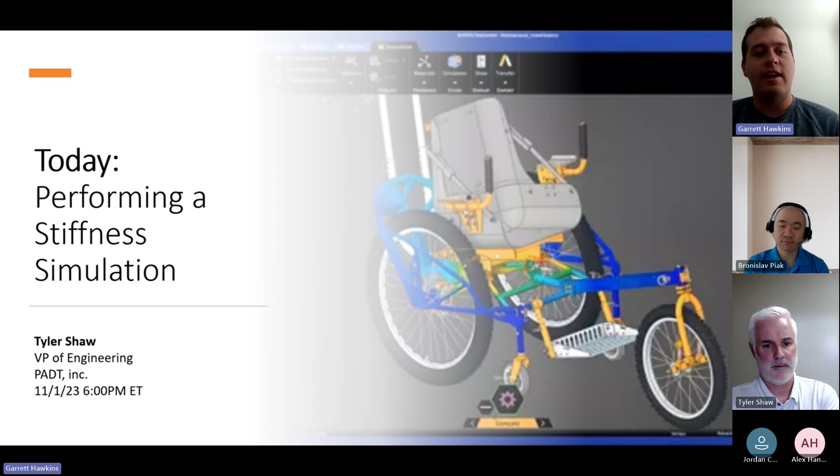Tyler, do you want to say a few words now? Yeah, so real quick, just so folks on the call understand, PADT is uniquely positioned. We do not only simulation, we also sell and operate additive manufacturing tools and capabilities. But really the benefit we bring is we get to use both of those tools to really design products. Between our team, we have about 20 or so engineers and full-time analysts doing this work. This particular talk that Bronislav has put together is really focused on how we can use simulation as part of our design and why, to give folks a little more of a concept of how to interpret these results to make more detailed design decisions.

Thanks, Bronislav. Okay, thank you. Can you all see my screen? Yep, looks great. Okay, so my name is Bronislav Piak. I'm a simulation engineer here at PADT.

Today we're going to be talking about, I know the topic was kind of performing a stiffness simulation, we kind of rebranded it a little bit. We're going to be talking about structural analysis considerations. So what are the structural analysis considerations when designing a UAV? What load cases need to be considered and why?

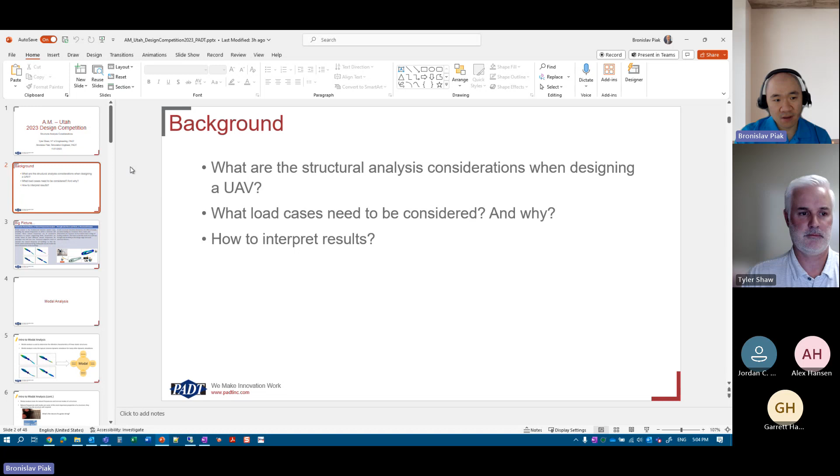How to interpret results. So there are basically two analysis types that you want to be considering when designing a UAV. One is so-called modal analysis. The second one is strength analysis, or structural analysis, sometimes called.

Modal analysis is the fundamental dynamic analysis type, providing the natural frequencies at which a structure will resonate. For instance, there's a propeller, and these are some modes, natural frequencies, mode shapes for this propeller. These natural frequencies are of paramount importance in various engineering fields.

For instance, suspensions are usually tuned so that they have different natural frequencies for passenger cars and race cars. Structural engineers need to calculate these frequencies for buildings, for instance, so that the seismic waves produced during an earthquake do not match the natural frequencies of the buildings, and they don't collapse.

The second type of analysis that is of importance when designing components and structures is structural analysis. The simplest form of it is so-called static structural analysis, and it determines the effect of steady or static loading on a structure. Outputs of this analysis are usually stress, strains, and deformations, and they can be studied under a range of loading conditions. This helps to identify weak areas with low strength and durability at the design stage and avoid expensive failures.

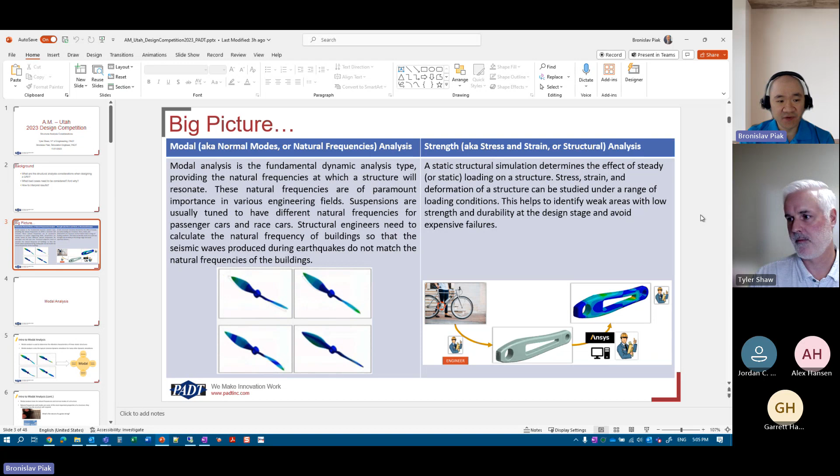So let's talk a little bit more about modal analysis first. Again, modal analysis is used to determine the vibration characteristics of linear elastic structures.

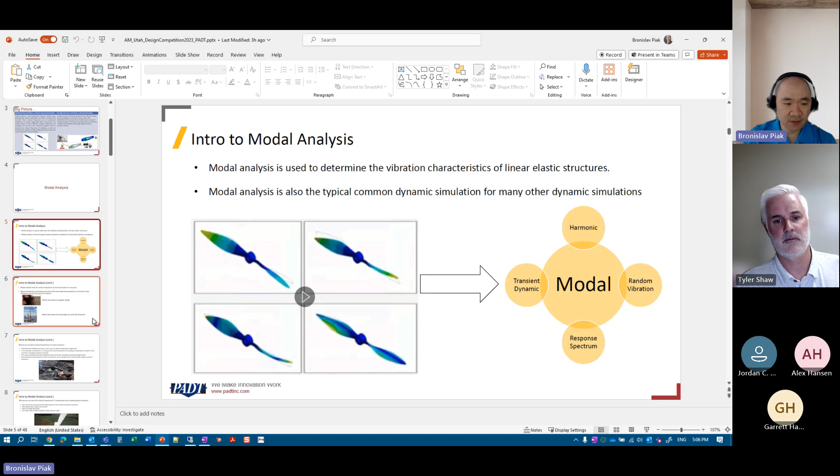Modal analysis is also the typical common dynamic simulation entry point for many other dynamic simulations. Basically, it's an entry point into more complex harmonic, random vibration, response spectrum, and transient dynamic analysis types. But still very valuable. You would always want to start with modal analysis before going deep into these more complex types of dynamic simulations.

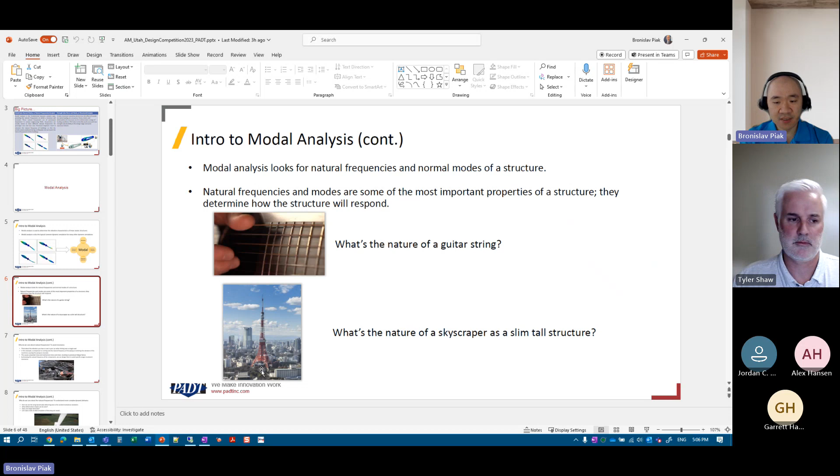Modal analysis looks for natural frequencies and normal modes of a structure. Natural frequencies and modes are some of the most important properties of a structure, and they determine how the structure will respond. For instance, think about this guitar string - what's its nature? Or a skyscraper as a slim, tall structure - what's its nature?

Why do we care about natural frequencies? The answer is to avoid resonance. Think about the vibration of a car when driving over a rough road. In this example, a compressor is running and the natural frequency of the piping matches the vibration of the machinery, causing the piping to resonate. We want to avoid this when designing, as it causes unwanted noises, mechanical stress and strain, resulting in premature fatigue failure. By knowing the natural frequency of components, we can design them to avoid specific ranges and prevent resonance.

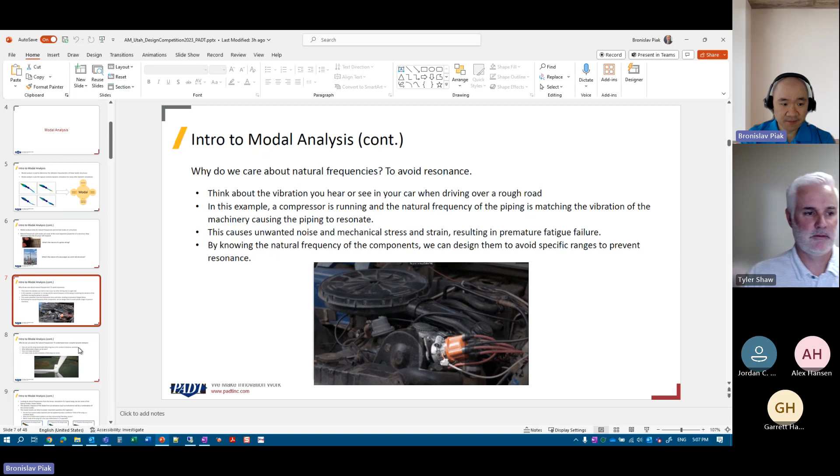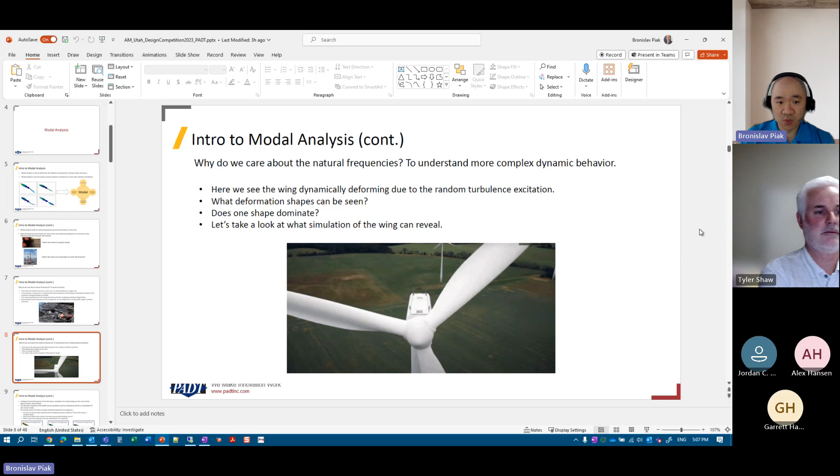Why do we care about natural frequencies? To understand more complex dynamic behavior. Here we can see the wing dynamically deforming due to random turbulence excitation. What deformation shapes can be seen? We can conclude this based on modal analysis. Does one shape dominate? Let's take a look at what simulation of the wing can reveal.

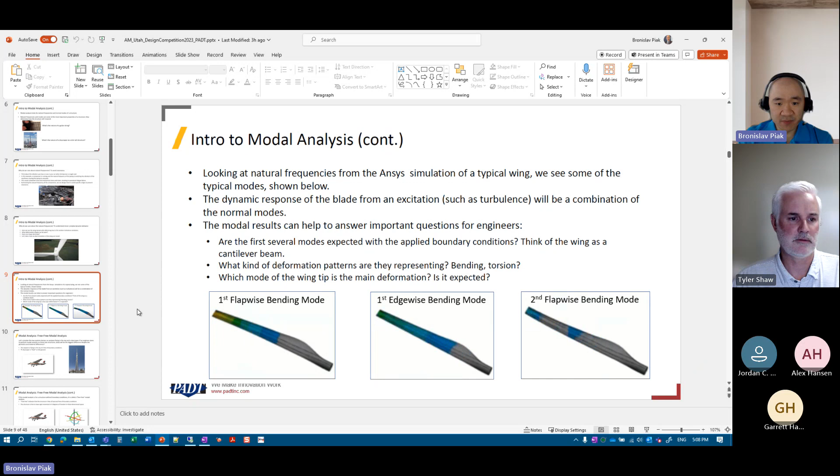Which mode shows the wing tip as the main deformation - is it expected? Let's consider two systems: an airplane flying in the sky, and a skyscraper. If an engineer plans to perform modal analysis on these two structures, what will be the biggest differences, despite the geometry and material differences? The airplane is flying in the sky, so it's free of boundary conditions. The skyscraper is fixed on the ground.

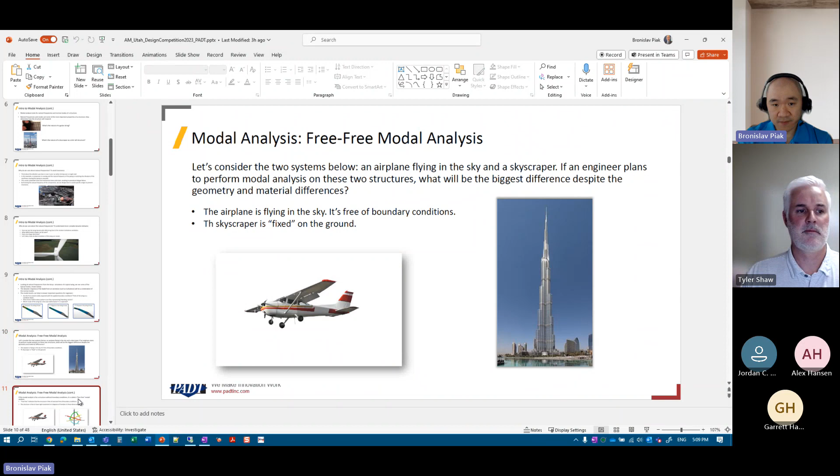If the modal analysis is for a structure without boundary conditions, like this airplane, it's called a free-free modal analysis - a special type of modal analysis, applicable for those designing a drone or UAV. Free-free indicates that the structure is free of loads and free of boundary conditions. The structure is free to have rigid body movements in 6 degrees of freedom in 3-dimensional space. We expect, when running free modal analysis, the first modes to be so-called rigid body modes - 3 in translational directions and 3 in rotational directions.

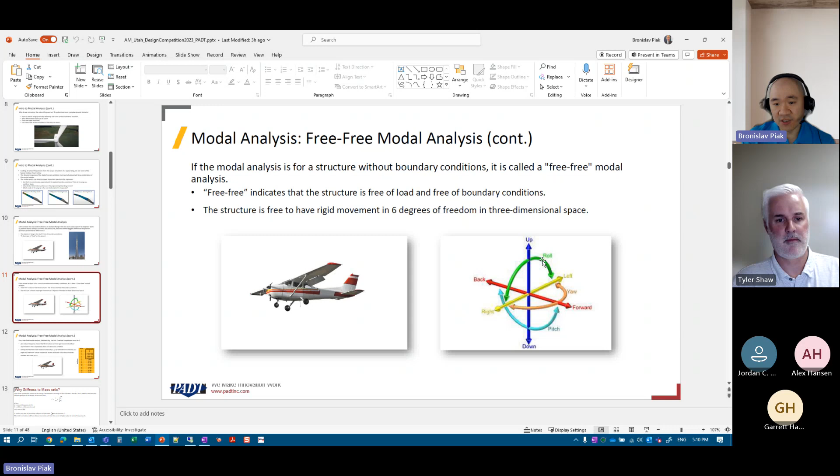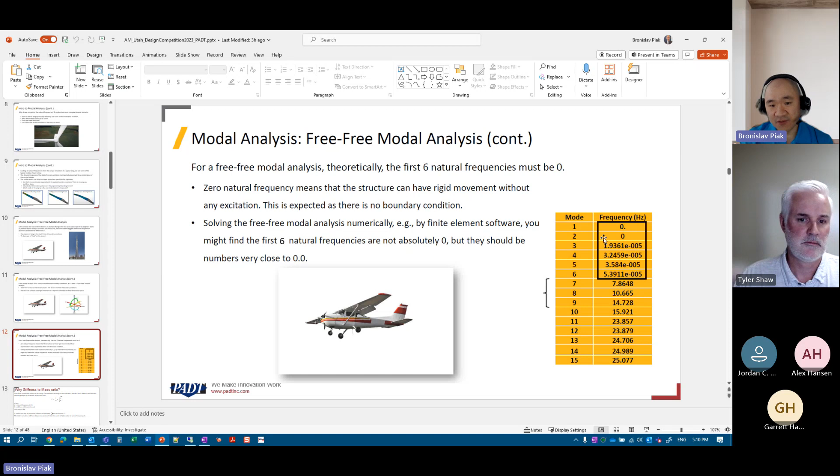Starting from the 7th mode and further, we see so-called flexible body modes. So when solving the free modal analysis numerically, for instance using finite element software, you might find the first natural frequencies are not absolutely 0, but should be close to it.

One of the quantitative criteria in this design competition is to design a UAV with the best stiffness to mass ratio. Why do we care about stiffness to mass ratio? Without going into all the math, it turns out natural frequency f equals 1 over 2 pi times the square root of k over m, where k is stiffness of the structure in a certain direction and m is mass. So stiffness to mass ratio is baked into the formula for natural frequency. The trick is to balance stiffness and mass such that they result in a higher natural frequency.

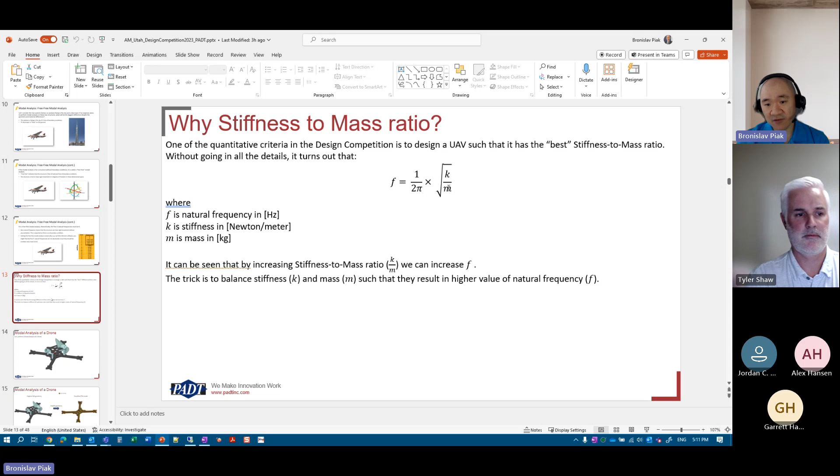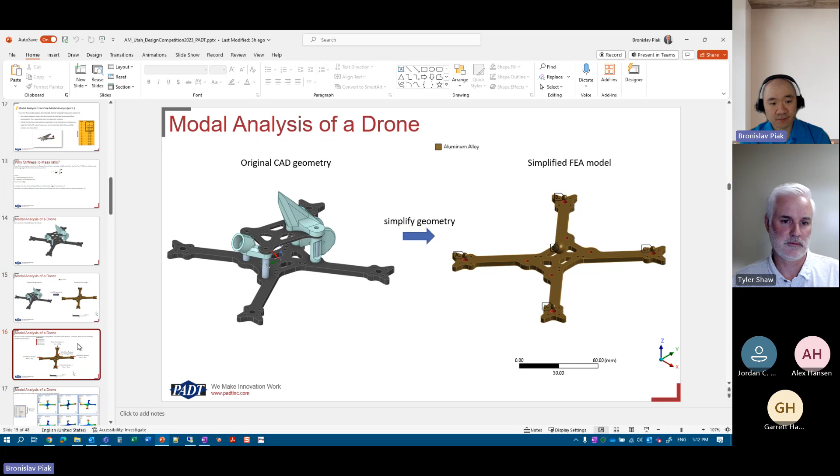So what do we do? Here we'll assume the material of this frame is aluminum, and we're going to run a so-called free modal analysis, so this body is not constrained in any way. We also created point masses representing each motor, assuming 10 grams for each motor, as well as a point mass in the center representing payload. And we run the free model.

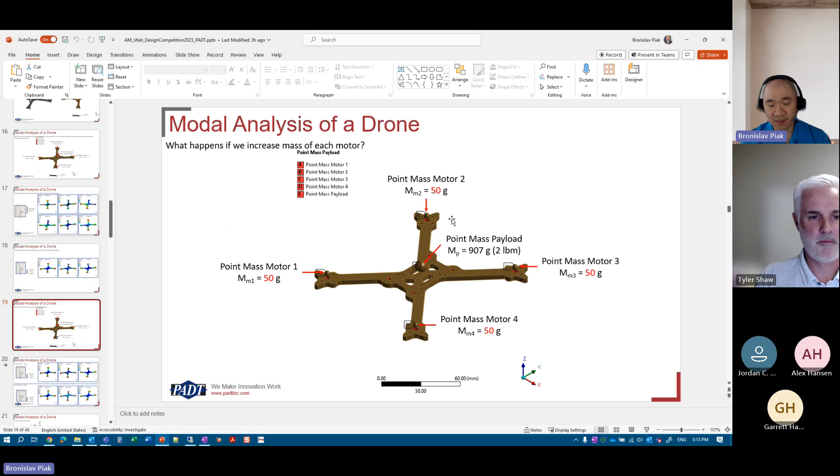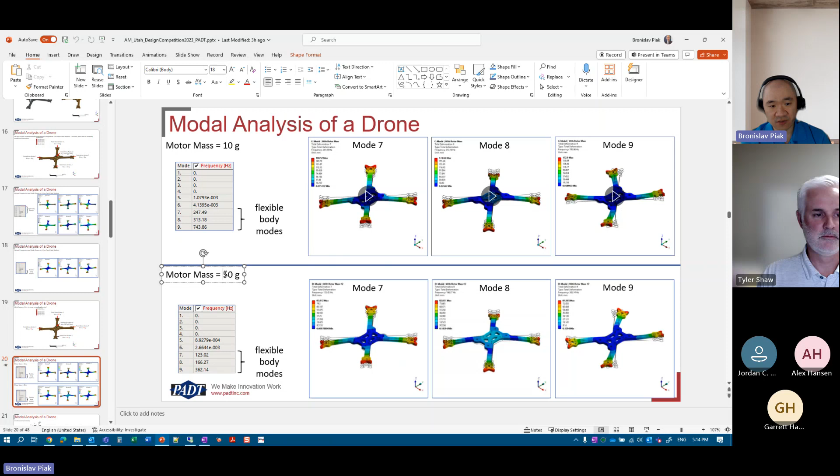Now what will happen if we increase the mass of each motor? Let's say each motor is not 10 grams but 50 grams. Running the free model again, we'll see this comparison. At the top are the frequencies and mode shapes when motors are 10 grams, and at the bottom, when each motor is 50 grams. We can see that the numbers for the 7th, 8th, and 9th modes actually changed and are smaller now. In terms of mode shapes, they're pretty much the same - just bending here as well, and this one too. So why did it happen?

Going back to this formula, we can see what happened: we increased m. If we increase m, this makes f a smaller value, and that's exactly what happened - we see 123 versus 247, etc.

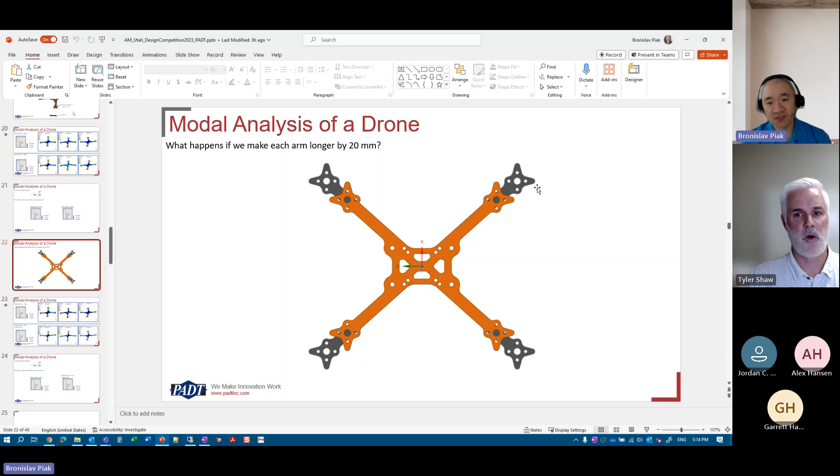Now what will happen if we stretch each arm, making it longer by 20 millimeters? By doing this, we reduce stiffness - we can say it's more flexible now.

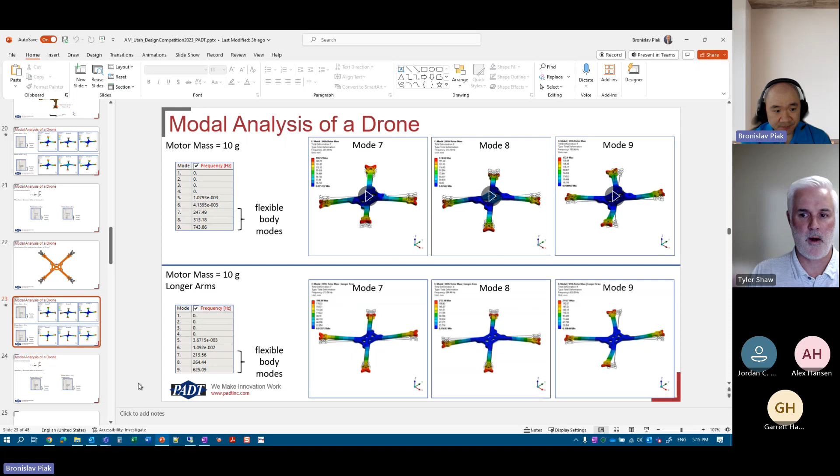Running a free modal again, the same first 6 are rigid body modes, then flexible body modes for comparison. At the bottom are the results of the modal analysis when each arm is 20 millimeters longer. We can see the frequencies became smaller, or decreased. Why did it happen? Again, according to this formula, if we decrease K, meaning we make the frame less stiff or more flexible, we decrease F - and that's exactly what happened.

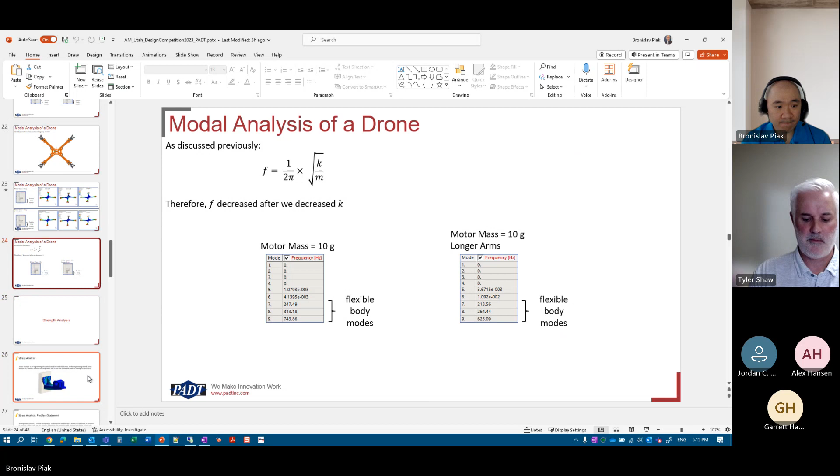And that's it for modal analysis. Now let's talk about strength or stress analysis.

Stress analysis is an engineering discipline based on solid mechanics. In the engineering world, it's the primary method engineers use to find the stress and strain of a design or structure. An engineer converts a real-life engineering problem into a mathematical model - for example, if we want to analyze a bike crank, we first need to determine the geometry with appropriate details, material properties, loads, and boundary conditions.

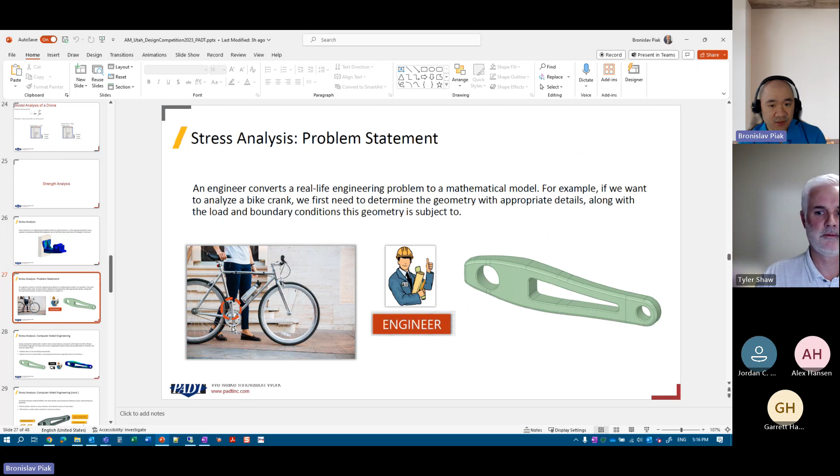Today, solving the mathematical model is done numerically by computers with help from FEA software. This FEA software does some advanced matrix math in the background, and then we get the results. This enables engineers to solve much more complicated systems than was possible before.

However, we must be aware that software does not do everything automatically - garbage in, garbage out. Engineers have the responsibility to make appropriate decisions regarding numerical simulations. It's us engineers who have to decide, from start to end, what are the boundary conditions, what are the loads, what assumptions we can make, material properties, and then when the results are there, it's us who decide if they make sense, if they are what we would expect, and then provide decisions and recommendations.

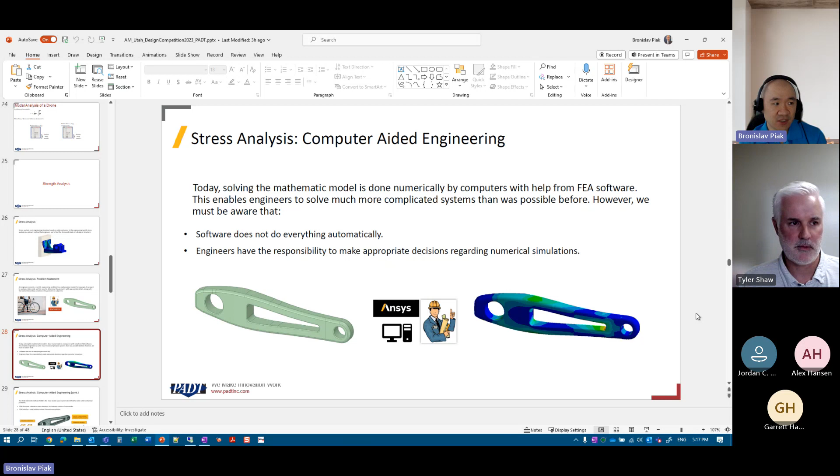So, I use this fancy word, finite element analysis, finite element method, also called FEM. FEM is the most widely used numerical method to solve solid mechanical problems. What it does is take a domain and discretize it into many elements.

You can see those triangles here. These are basically elements, and each element consists of many nodes. This is a simplified representation of different types of elements. There could be hex elements, there could be tet elements, and a tet element, for instance, has 4 nodes. Sometimes it can have 10 nodes, etc. The software operates on those nodes, finding solutions for them in the background using advanced matrix math.

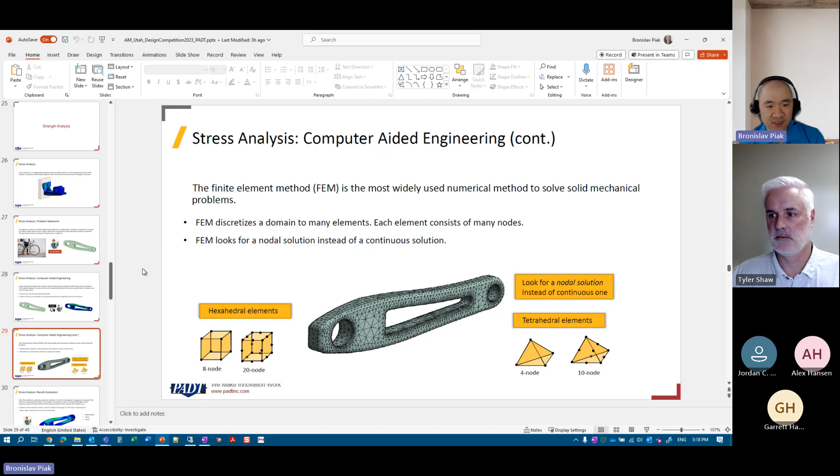After the problem is solved by numerical methods, it is left to engineers' judgment to decide if the result is as expected and realistic. This requires an engineer to have a strong knowledge of solid mechanics and be familiar with the finite element analysis concepts that the software uses. It's us engineers who have to interpret results to check the validity of the design and find ways to optimize it. Again, software doesn't do this automatically.

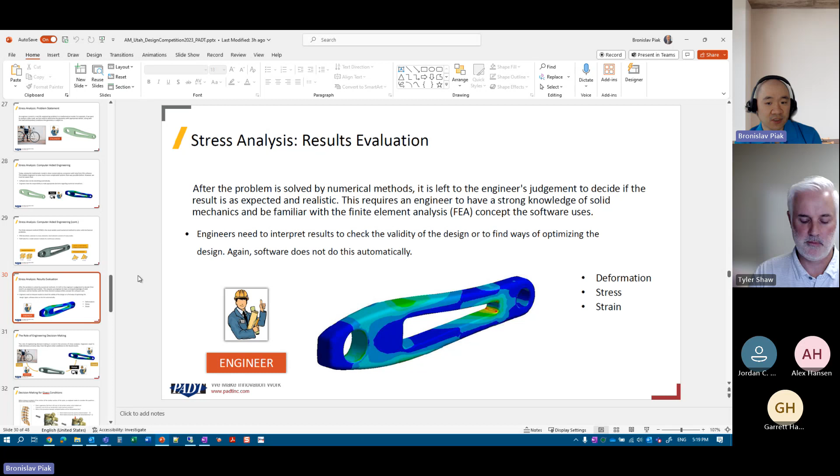We as engineers check results, we check deformations, stresses, strains, and compare them to our criteria, making sure the criteria is met, or if it's not met, what we should do in order to improve or make it compliant.

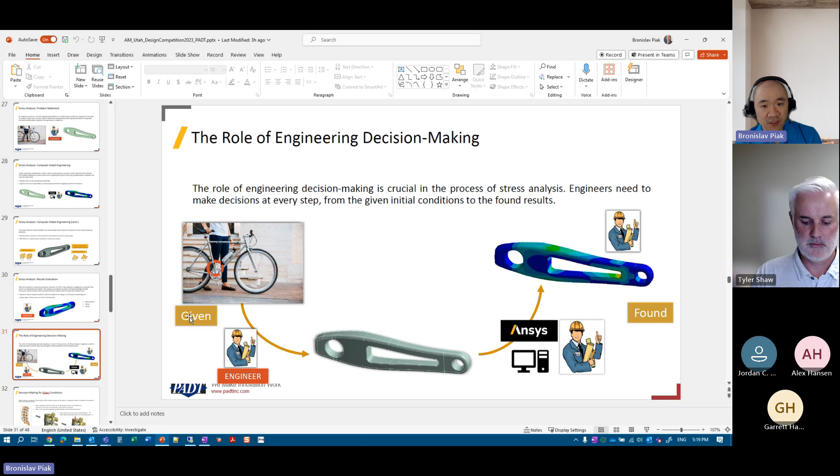Therefore, the role of engineering decision making is crucial in the process of stress analysis. Engineers need to make decisions at every step, from the given initial conditions to the found results. Let's consider, for instance, this example.

What is the connection between vertebral bodies and the intervertebral disc? How one connects to two, how two connects to one, what material should be used for one, what material should be used for two, and how can we represent this complex loading condition? Where do we fix it? Where do we apply load? What load should we apply?

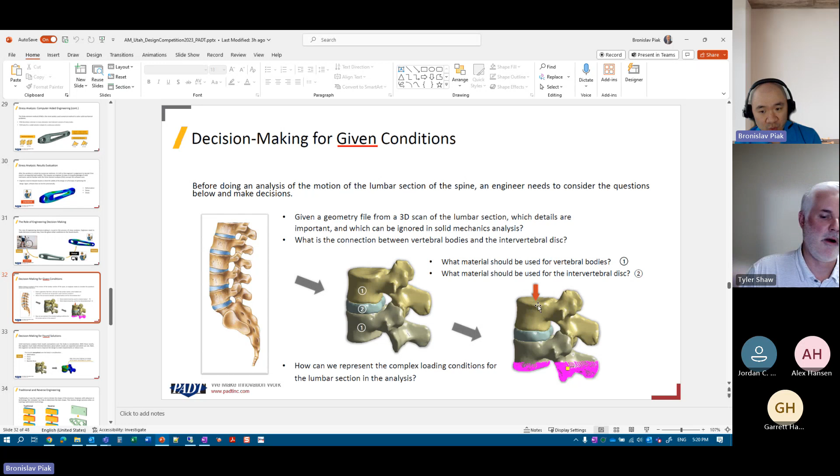And so on. Let's say we run the analysis next, and then we got some results. So we need to ask these questions. First, we need to review the results. We need to make sure that they make sense, that they're as expected. We usually review deformations, stresses, strains, reaction forces.

And then based on these results, we should analyze, think about them, and then decide if, in this case, the design of the spinal spacer is sound or needs some changes and improvements.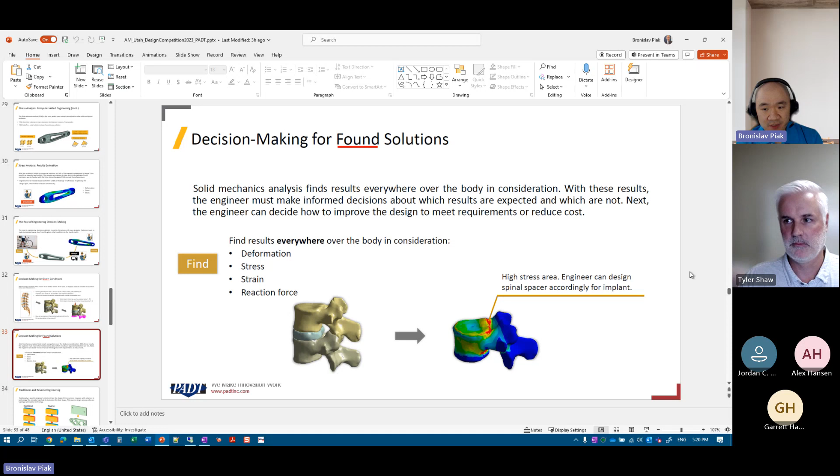Traditionally, it was the engineer's role to dictate the shape of the structure. That's the traditional workflow: first a design engineer would create a design, 3D CAD for instance. They would provide this geometry to a structural analysis person, who would perform analysis, and the analysis engineer would tune the geometry and provide recommendations for design improvements and so on.

Nowadays, with advances in technology, computer can help determine the best shape. This reverse design process relies on so-called topology optimization technology. But again, it's still us engineers who set the optimization goals for the software, while the software comes up with certain shapes that are optimized based on certain targets.

You all had this topology optimization basics webinar before by Jorge. So I encourage you to watch it again, just to get familiar with what can be done within Discovery in terms of topology optimization.

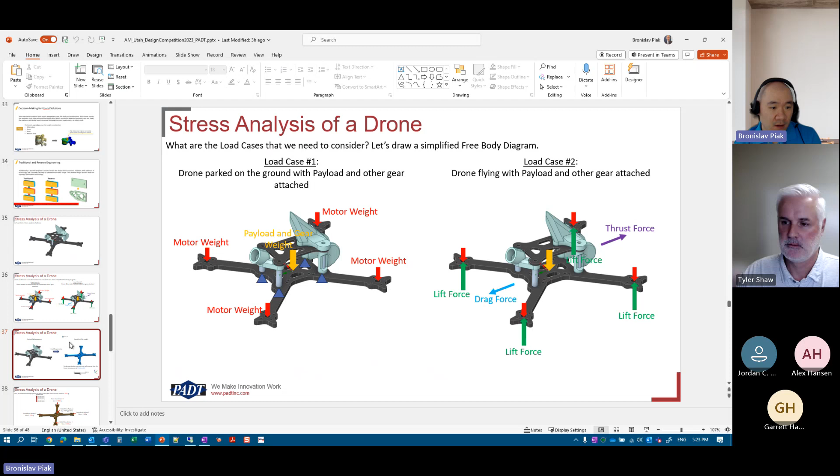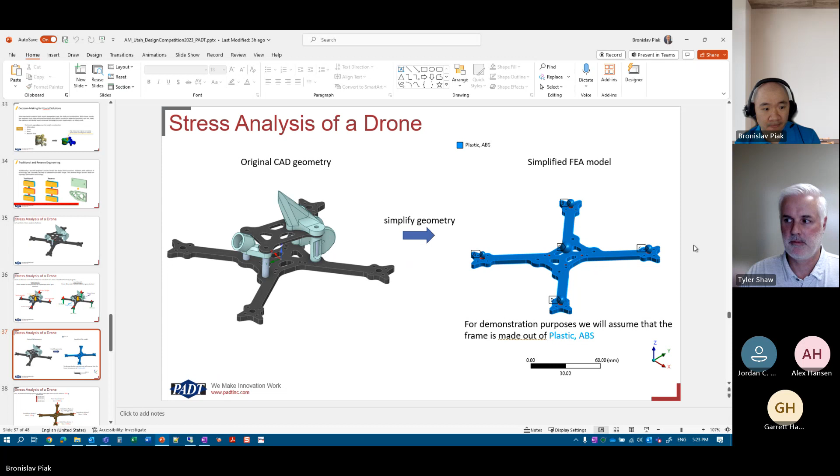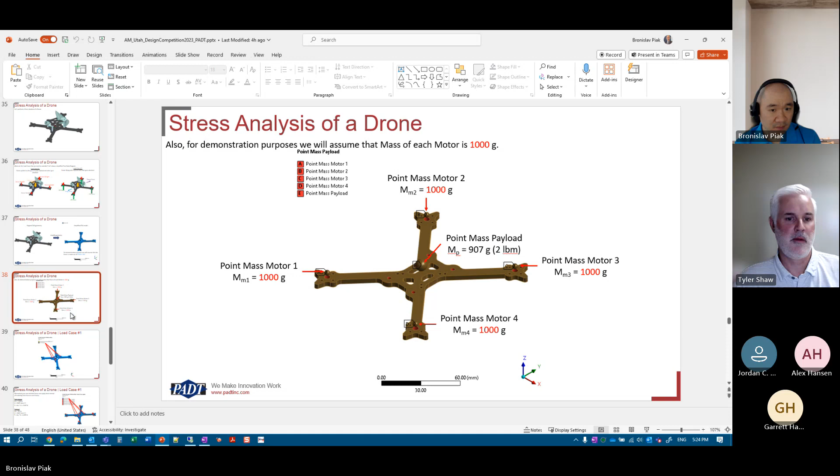Now, again, we start with simplifying geometry. For demonstration purposes, we will assume the frame is made out of plastic. We also assume, for demonstration purposes, that each motor is 1,000 grams, and the point mass payload is in the center, 907 grams. So this is our finite element analysis setup, or simulation setup.

So for load case 1, when the drone is parked on the ground, we fix at the leg locations and apply standard Earth gravity. Alternatively, we can calculate forces first and apply them instead of modeling point masses. These two approaches are exactly the same - they will provide exactly the same results. It's just a different approach in modeling: one where we let the software calculate forces from point masses, and the other where we calculate forces ourselves instead of modeling point masses.

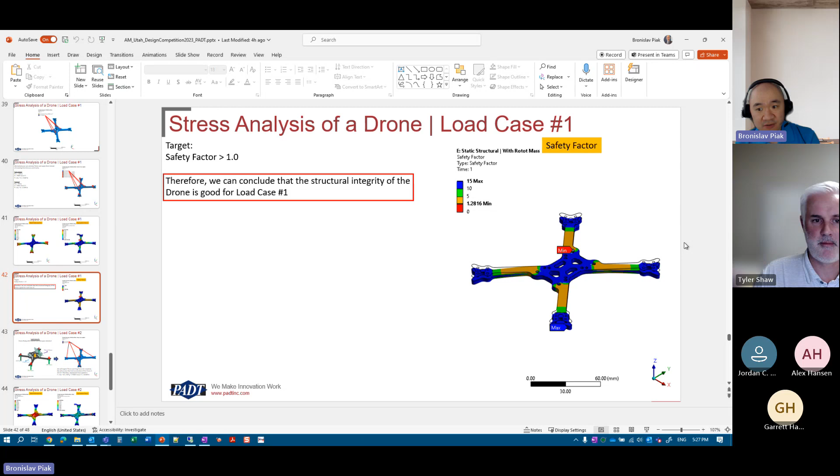Let's consider load case 2, drone flying. Here we simplify again - we will neglect thrust force and drag force. We'll fix the 4 arms on the outside, and calculate and apply the remote force representing the payload. We'll assume 3G vertical acceleration, which relates to dynamics. We're trying to cover the dynamical behavior of this drone, because you may say, isn't gravity 1G? Yes, but in dynamics, G's are higher. So we assume 3G, and that's the force based on 3G and mass.

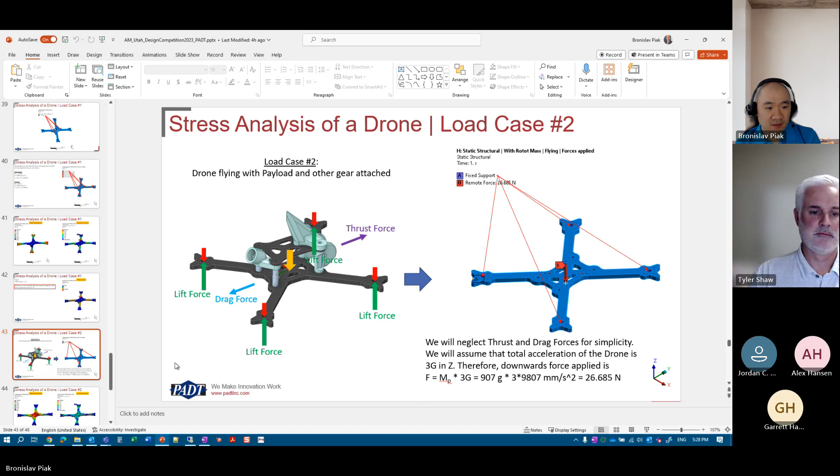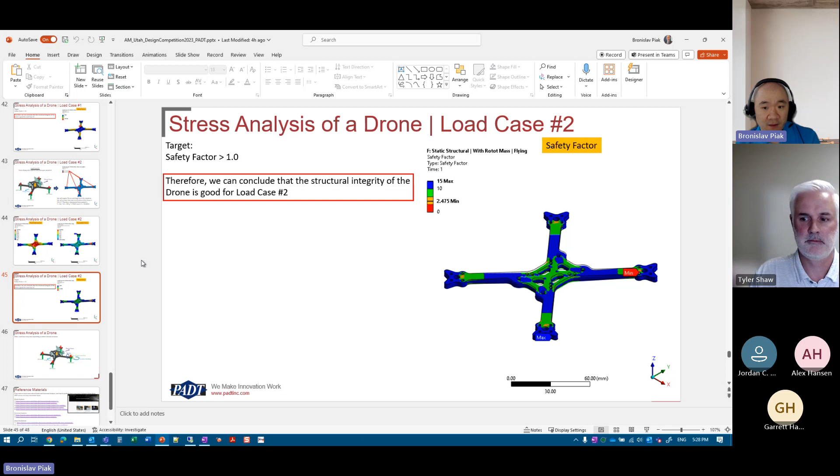Let's see - the minimum, the lowest value for the safety factor is 2.475, while the target is 1 again. So we can conclude that in load case 2, this design is good as well.

So there may be other load cases depending on the other relevant scenarios and design of your drone. So think about it again, analyze, maybe do your research and see what load cases you may have to consider.

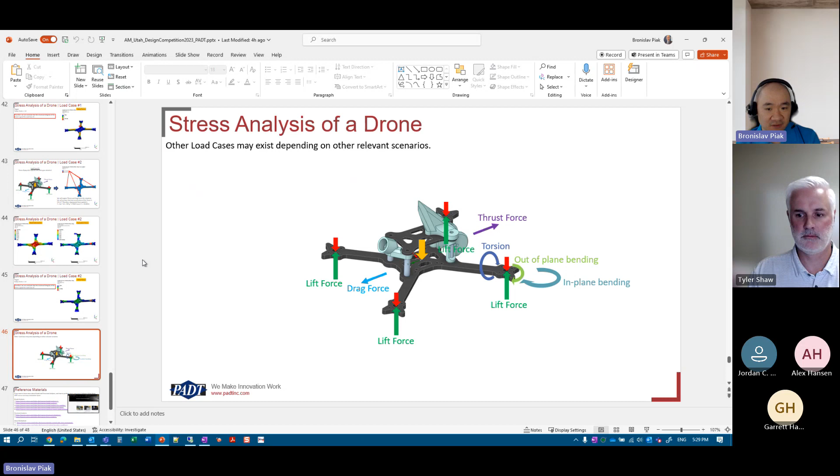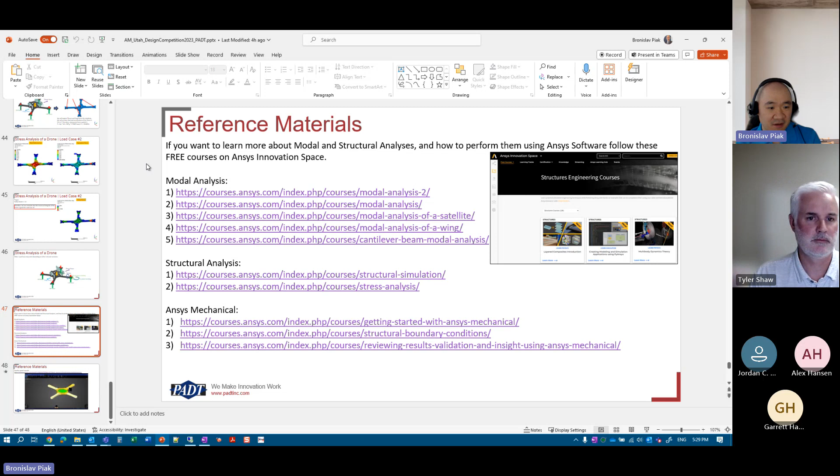If you want to learn more about modal and structural analysis and how to perform them using ANSYS software, we've provided these links. I would highly recommend looking at them and even trying them. There are some workshops that are great. And there's one more link, a good tutorial that walks you through not only FEA but also CFD, computational fluid dynamics, and some topology optimization as well when designing a drone, using ANSYS Discovery.

And that's it, I think, for me now.

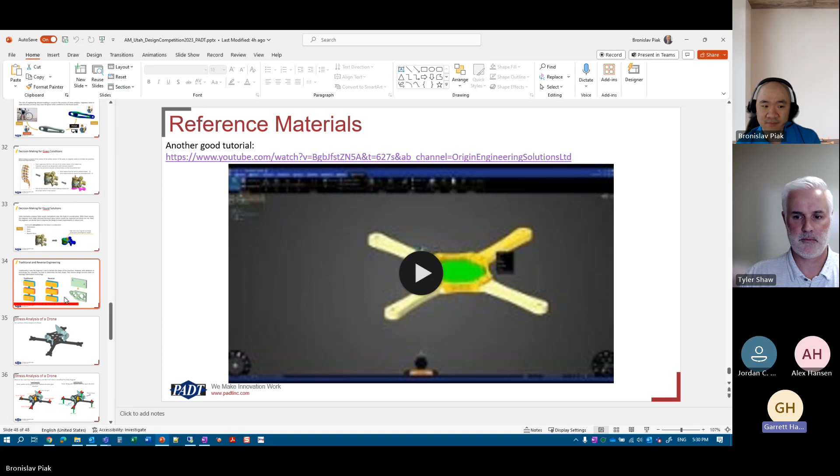Do you mind if I add two more comments? Yeah, sure. So one is, you talked about going from a more computer-based approach, having your output and using topology optimization to get there. I think it's important for Alex and Jordan and the other participants as well that you can use the stiffness simulation and the modal analysis to make your design even better.

And you talked about garbage in, garbage out. Yep. When we do these simulations, our topology optimization or our design that we think is great may be garbage. And the benefit of looking at something like Discovery or an FEA analysis is it shows you where these bendings or these modes are. Then you can go in as a designer and as an engineer and add additional support to those areas. As you eliminate those bending moments, or as you eliminate where those modes are focused, you're going to make your structure overall less resonant.

You're going to make it stronger. And so it's not that you design once and then put it into this and say, yep, we're done. It can really be an iterative process. Exactly. Yep. And should be.

Agreed. Let me pull on that thread too a little bit, Garrett. I think it's really important to think of your system from a systems engineering approach, right? So if you're looking at modes and modal analysis, if you have matching frequencies, for example, between the rotation in which your propellers are turning and a mode that happens to show up on one of the arms of your structure, you can excite that in a way that maybe your payload becomes unstable. Or maybe if you have a gimbaled camera on the bottom of it, now you lose stability or controllability of your flight system.